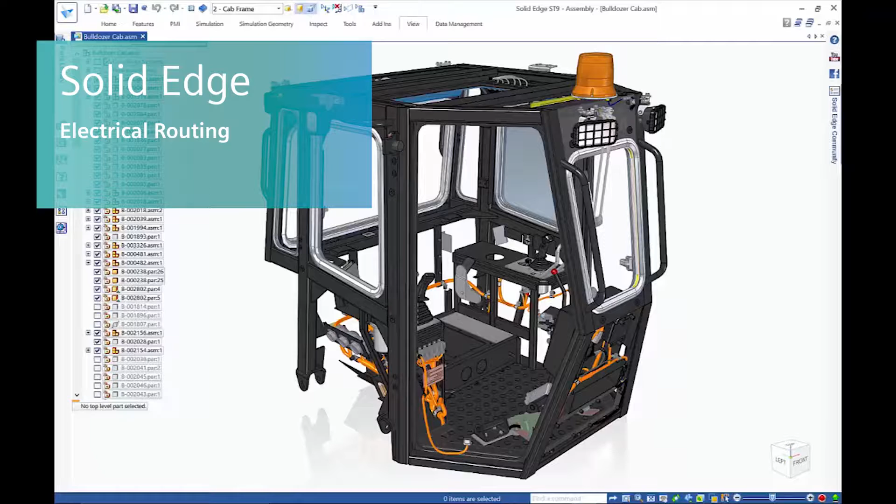Solid Edge provides its users with a powerful and intuitive experience when creating wire harnesses. In today's project, we'll be finishing up a harness design by adding some additional lighting for a bulldozer cab.

We'll start by making the necessary changes to our harness schematic in 2D and then move it into 3D to finalize the design. Creating electrical schematics in Solid Edge is as simple as connecting the dots.

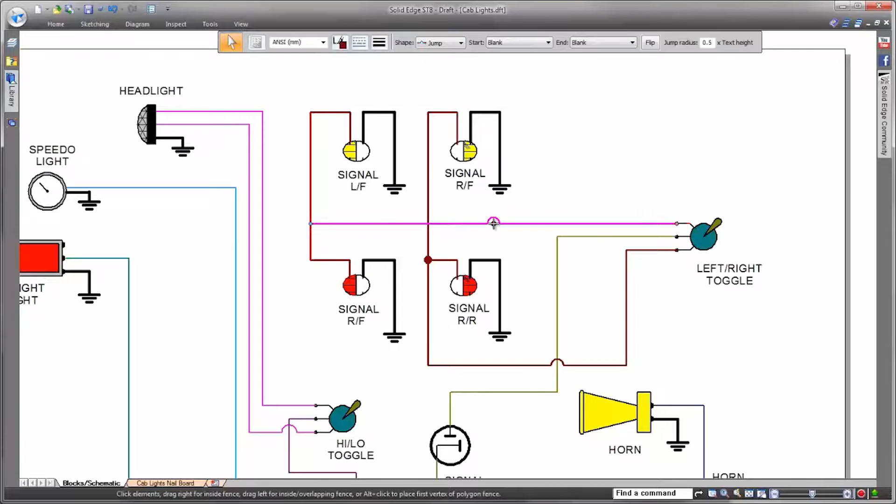Using a 2D schematic to connect all of our components together is a great way to visualize how the system is going to work. Here, we have pictorial representations of all of our electrical components known as blocks.

The great thing about designing electrical schematics in Solid Edge is that we're provided with an entire library of these blocks ready to use, or that can easily be changed to meet whatever needs we have.

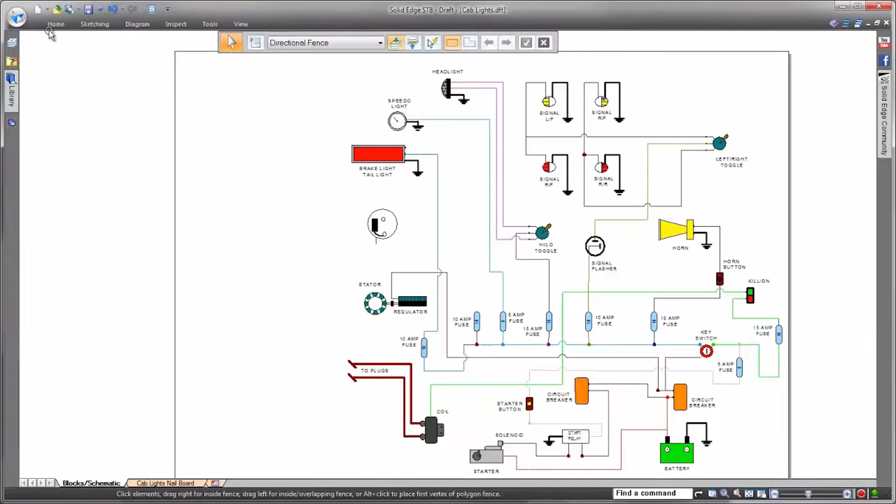Alternatively, if a block has already been created in another schematic, even within another software package such as AutoCAD, it can easily be reused as well.

To finish up our schematic, Solid Edge can automate the creation of a block table that can pull all of the important information that we need from our components.

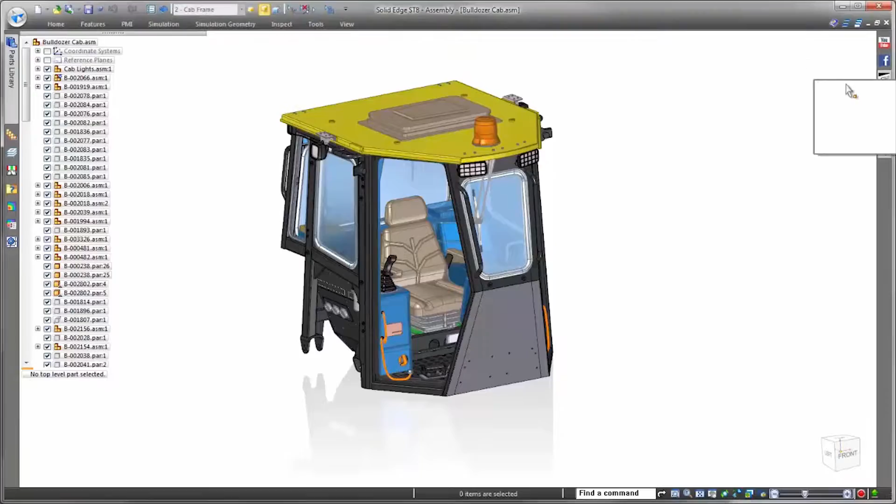Now that our schematic is done, let's see how Solid Edge routes wires in 3D. As we remove the walls of the bulldozer cab, we can see a large majority of the cab wiring has already been completed. The section of the cab we'll be focusing on is the lights on the top frame.

For this portion of the wiring, as is commonplace in industry, we'll be using a 2D ECAD system to generate wire and connector information for our cab layout.

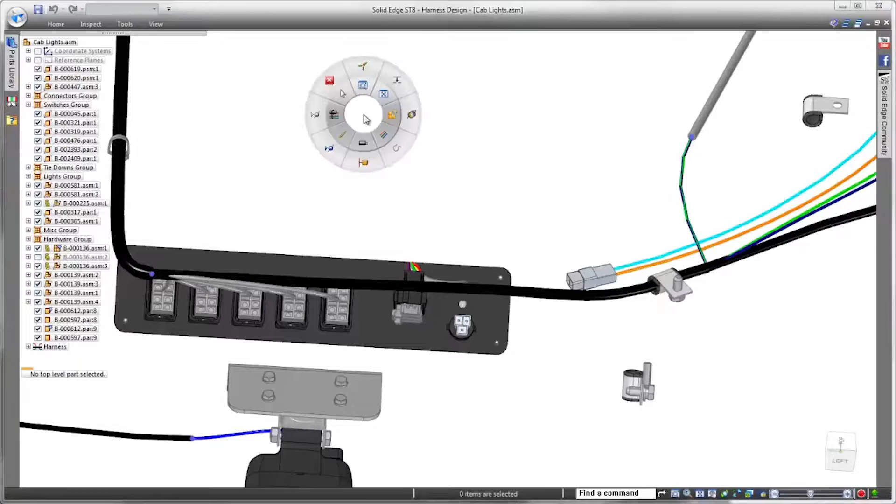As the harness wizard takes us through the steps to import the data, we'll get a good look at how easy this is. First step, select the files that contain the schematic data.

The second step gives us a nice view of the components that the wires attach to. If there are multiple instances of the same component, Solid Edge lets us know so that we can select which one we want to use.

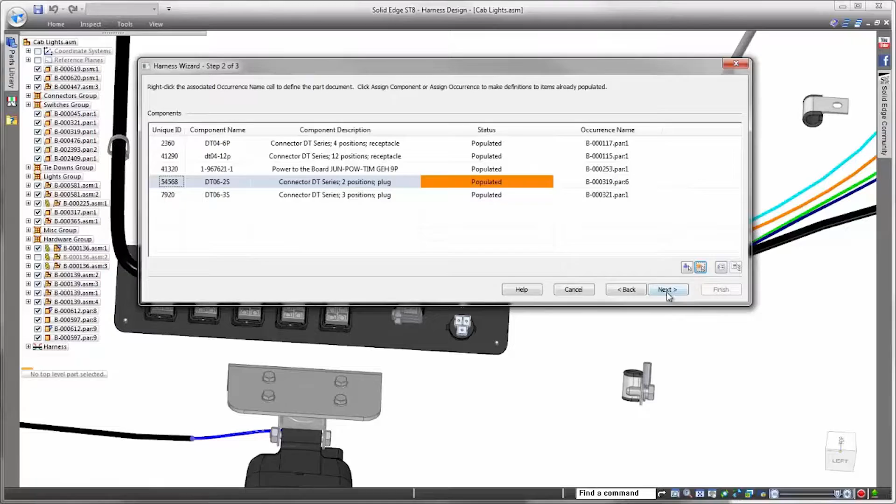Easy! The final step in the wizard is to ensure that all of our wires, cables, and bundles have been assigned to their associated connectors.

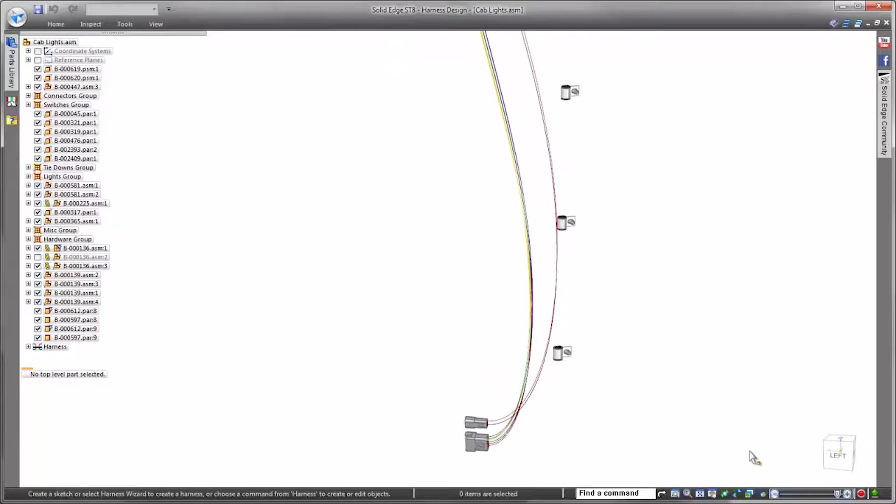After a quick check to make sure that everything's where it's supposed to be, we can finish the import and watch as Solid Edge automatically generates the wires, knowing that they're all in the right place, a huge time saver for large electrical systems. Now that the wires have been placed, routing them is easy using Solid Edge's intuitive tools.

First, we want to place all of these individual wires into a cable and run it up through the clips. Once inside the cable command, Solid Edge provides us with instructions on what we should do every step of the way. Providing these easy to understand instructions makes it simple to learn and use any command inside of Solid Edge.

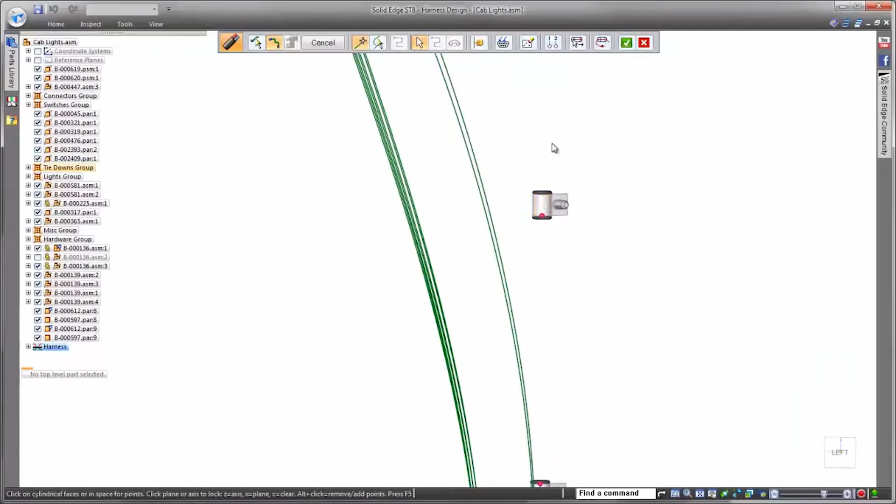Once our wires have been selected, we'll quickly create a new cable path up through the clips.

Now that we've got our main cable coming up from the controls to the roof, let's get our lighting components properly wired and placed. We've seen how easy creating a new path is, but what about rerouting cables that have already been placed? Not to worry, that's even easier.

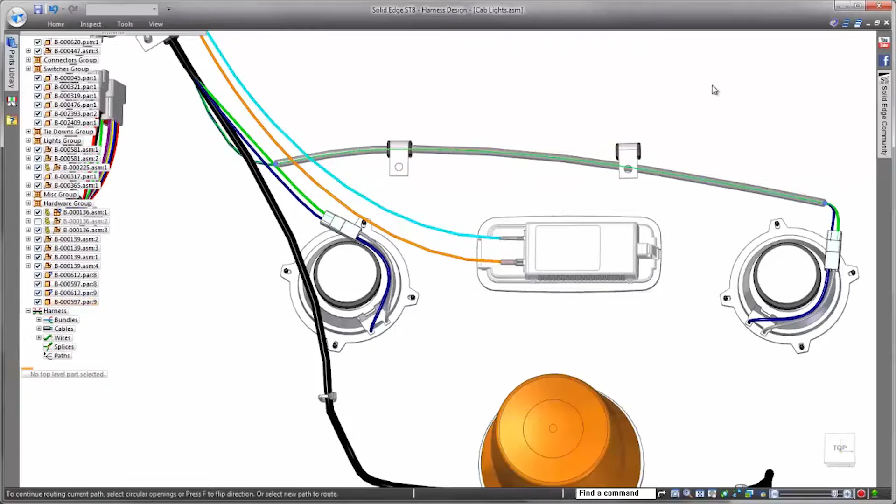Select the cable, select the clips, and Solid Edge handles the rest. But what happens if we need to add additional wires into an existing cable or bundle?

Here, we need to clean up the interior light wires to combine them with the main harness. While we could easily create and route another path, why not just simply split an existing path and add the wires there, using that existing route location to easily clean up the harness.

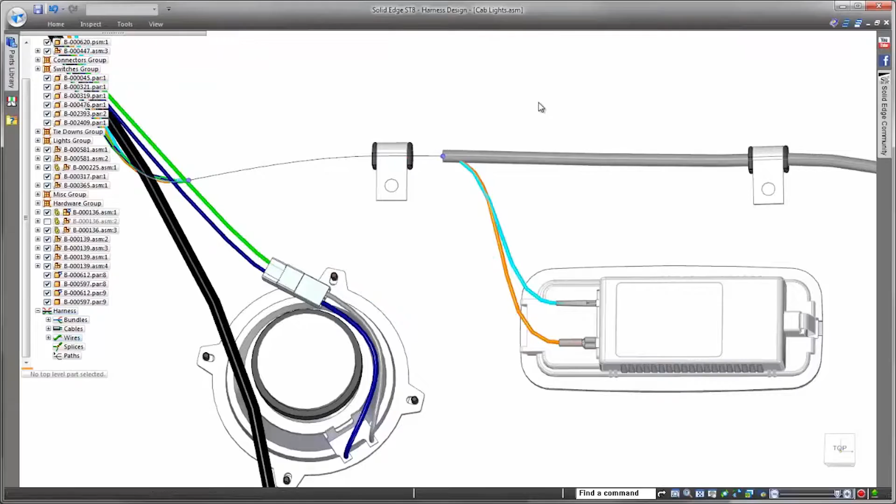Also notice when we create a physical representation of the newly created bundle, the diameter changes with the added wires, giving us real results so that we know what to expect when this harness is physically created.

We've seen how we can work with existing wires inside of our model, but now we need to create a couple of wires from this front left light to our switch panel.

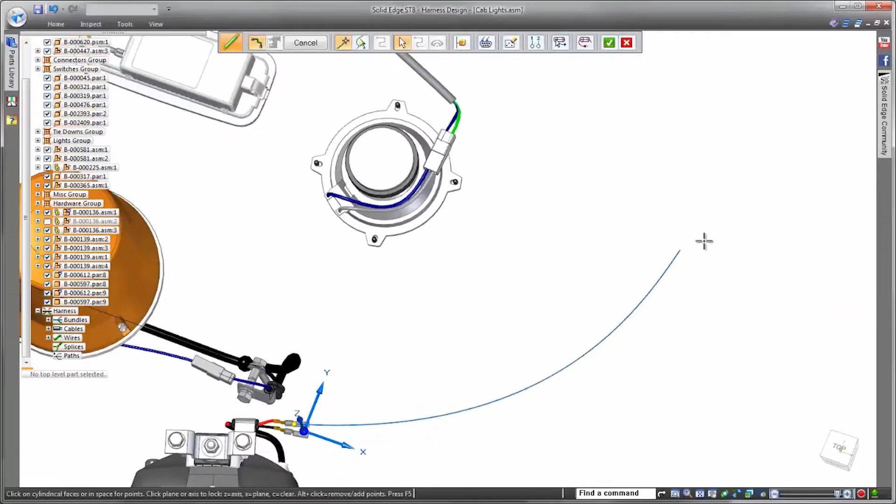Creating wires in Solid Edge is just as simple as importing. Notice once again how easy Solid Edge makes routing using existing geometry.

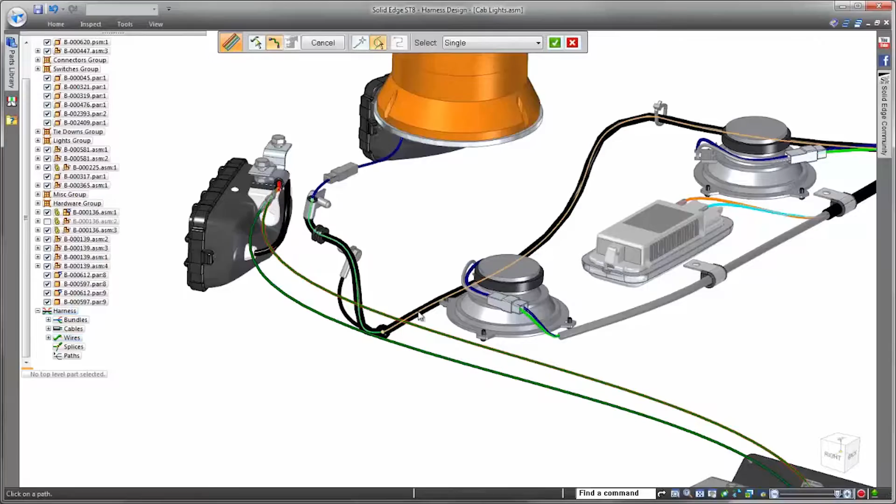Now that we've got our wires in place, we need to make sure that these wires bundle nicely with the rest of the harness. Once again, using existing paths is a great way to get the proper wire runs we need. A quick selection of our two wires and we have the freedom to bundle them into any paths that have already been created. Simple and clean.

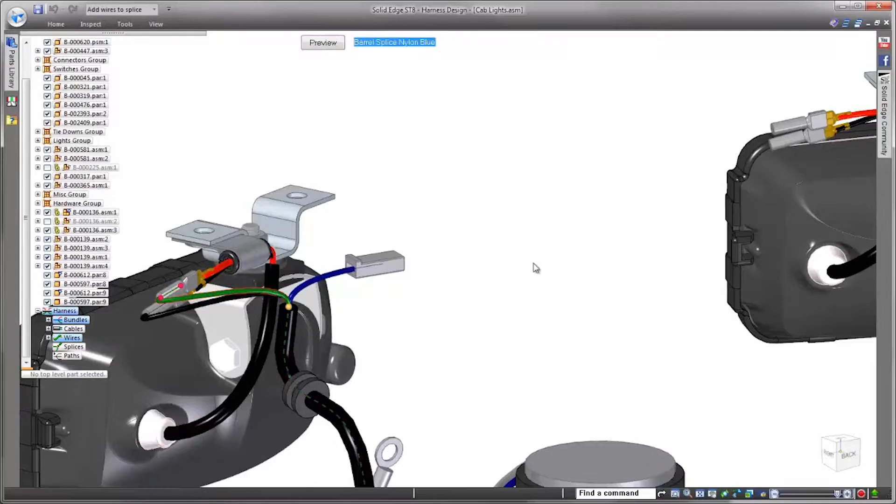Solid Edge also offers some other great tools such as splicing. Keeping consistent with intuitive commands, adding a splice is as easy as selecting which wire, where you want to splice it, and then use that as an anchor point for the wires you want to splice in, just as you would in real life.

Additionally, if you're working with purchased cables of certain length in your assemblies, Solid Edge easily accommodates for that as well. Simply input the length that the wire will be, and notice that even if the component that it's connected to is moved, the length stays the same.

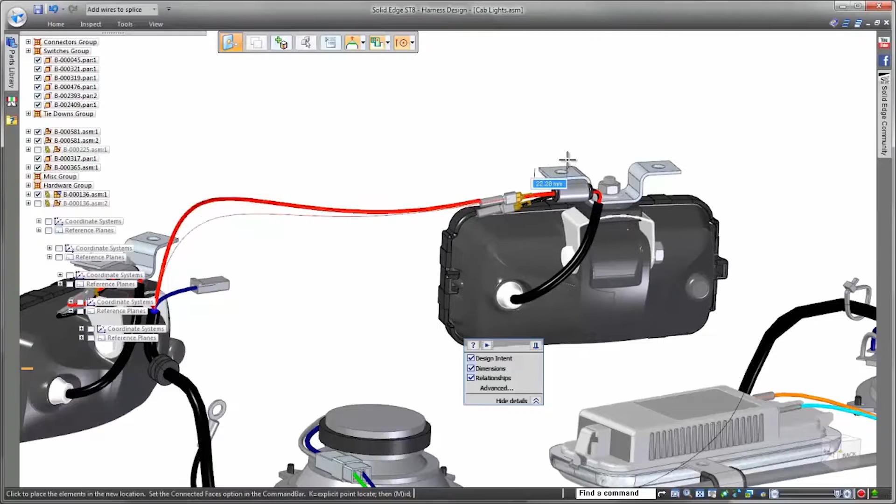Of course, once our harness has been completed in the assembly, we can easily output all of the information directly back to our ECAD system, making sure that our wire sizes and lengths are appropriate for their use.

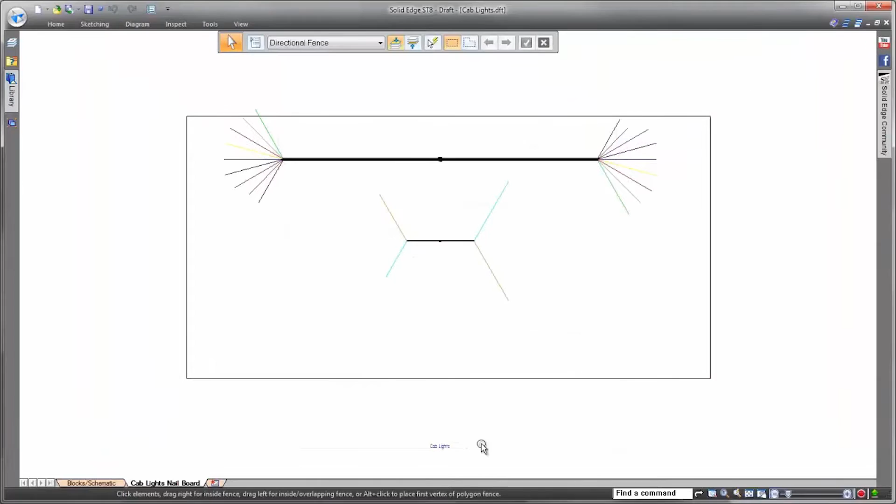The final step in harness creation is making a nailboard drawing representation. Nailboard drawings allow us to have a real-size 2D representation of exactly which wires will be bundled together and which connectors they'll use. This 2D representation will be attached to a piece of wood, and the physical harness will be built over the top of the drawing to ensure accuracy.

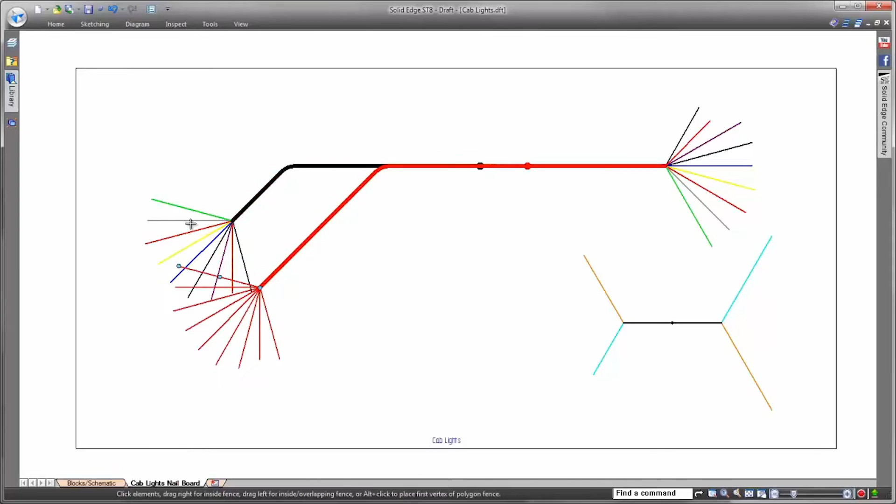Solid Edge offers complete control over outputs of the 2D nailboards, allowing us to organize them however we want. This includes adding bends to optimize space, all while maintaining exact lengths, a very important part of creating a wire harness.

Solid Edge also creates views of connectors attached to the wires with all associated pin information. Combine that with automatic creation of a conductor table to show the individual details of the wires themselves, from material and color to cut length and diameter, and you can see how Solid Edge ensures accuracy when building harnesses.